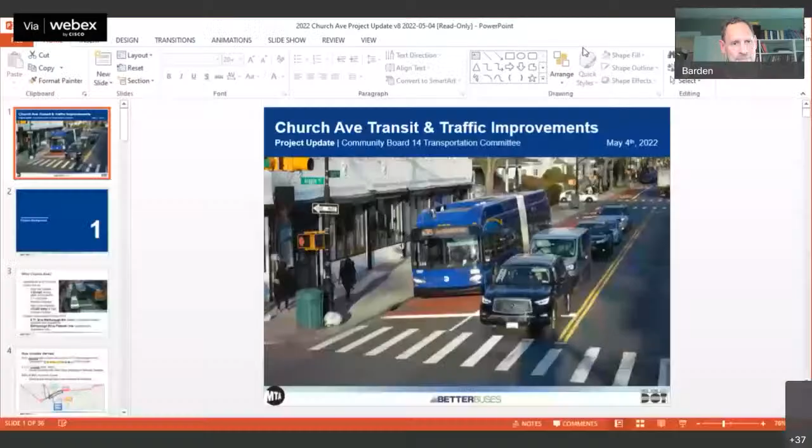Great, let me go ahead and share. All right, you all can see my screen, correct? Yep, great. Well, thank you so much for your time everybody, we really appreciate it. My name is Sarah Feller, I am a project manager on DOT's bus priority team. I have a cold right now, so if I cough, please excuse me. I'm joined by Warren Berry and Andy Inglesby from MTA. This was a joint project of ours.

You might recall that on Church Avenue, we put in a bus lane late in 2019 after presenting to CB14, CB12, and some other community stakeholders. This is a progress report letting you know how that bus lane has performed and where we're at now.

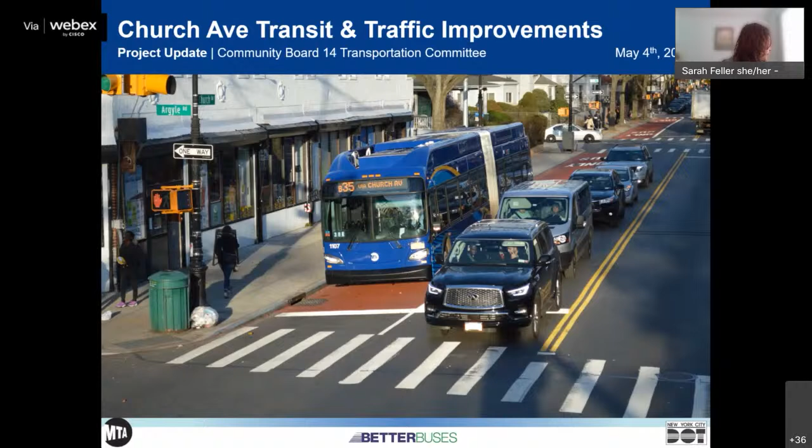So why did we do Church Avenue? Church Avenue was identified as a priority project in 2019 due first and foremost to very, very slow bus speeds. Church Avenue had bus speeds of about 4.25 miles an hour during the peak periods of the day, which is about a New York walking speed. And we know that especially on a busy route like this, one of the busiest routes in Brooklyn, with more than 45,000 people a day using the bus routes that use Church Avenue, on a route so busy, service should work better. It should be reasonably fast, it should be on time, you should know about how long it's going to take you to get from A to B. We need to get folks going where they need to go. And so we knew we had to do better, and that's why we pursued a project here.

After the community outreach process and the developing of this project, we implemented in October 2019: first, some curbside bus lanes from East 7th Street to Marlborough Road, and then updated curb regulations from East 7th to Marlborough, and further east as well, all the way to Flatbush. I'll show you that in a map in just a moment.

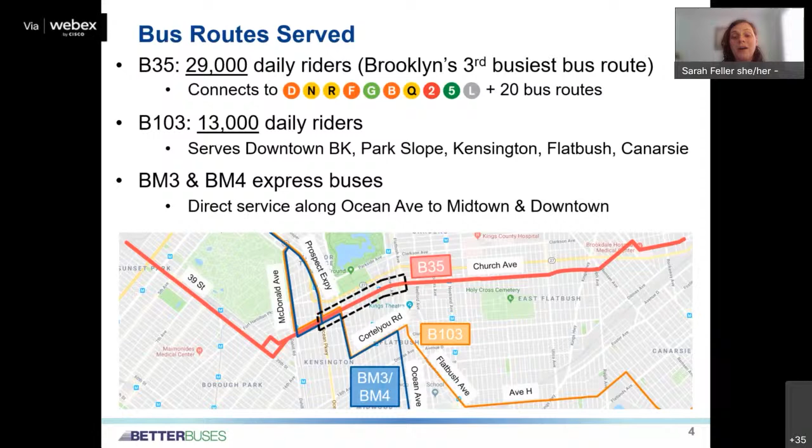This is a quick rundown of the bus routes that are served. Of course, the most important route is the B35. This goes all the way down Church Avenue, and then out in Borough Park, Sunset Park, it goes into 39th Street. So it's a really, really big, long crosstown route. It connects about a dozen different subway routes, and it's one of the busiest and ultimately most important bus routes in Brooklyn, in addition to 3 other bus routes that use certain parts of Church Avenue.

This is a quick aerial map showing where we put in each treatment.

Outlined in blue on the left side of the screen, from East 7th Street to Marlborough Road, is where we added curbside bus lanes and updated curb regulations to reduce double parking and ensure parking spaces were available on side streets when the bus lanes were in effect. Further east, from Marlborough Road to Flatbush, we updated the curb regulations only. In that area shown in yellow, we did not pursue a curbside bus lane, largely because it's so busy there.

There's so much curb demand. We studied how many vehicles are using the curb per day or per hour by block, and we realized that even though the bus needs it, a curbside bus lane wouldn't have worked there—there was just too much demand to use that curb for deliveries, shoppers, residents, and so on. So in the yellow section, all we did was update the curb regulations, again to reduce double parking and make more spaces available when people needed them.

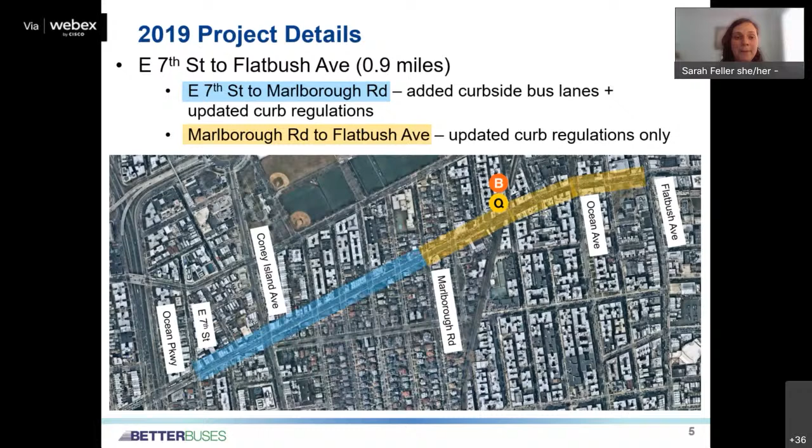This photograph at the bottom shows what the bus lane looks like today on Church Avenue, at Church and Argyle Road. This is the classic tried-and-true curbside bus lane—we've been putting these in New York City for more than 15 years, and they've generally been quite effective. This bus lane is active 7 a.m. to 7 p.m., Monday through Saturday.

That means parking is permitted overnight as well as on Sundays. You might recall that before this project, the Department of Sanitation was sweeping the street overnight three nights a week, so you couldn't park there overnight those nights. We worked with the Department of Sanitation so that now they sweep the streets while the bus lanes are in effect, and overnight parking is restored.

Some other benefits of this project: buses and all the people in them can now bypass traffic congestion. Especially on these short blocks, where there's a traffic light every 200 feet, instead of getting caught behind every other light, the bus can go through several lights without hitting a red, which really helps.

Additionally, since the bus is already up against the curb as it travels down the street, when it approaches a bus stop and needs to deploy the wheelchair ramp for someone using a wheelchair or walker, it's already parallel to the curb. That means it can deploy the ramp quickly and safely, which is definitely an accessibility improvement for folks who use wheelchairs or walkers.

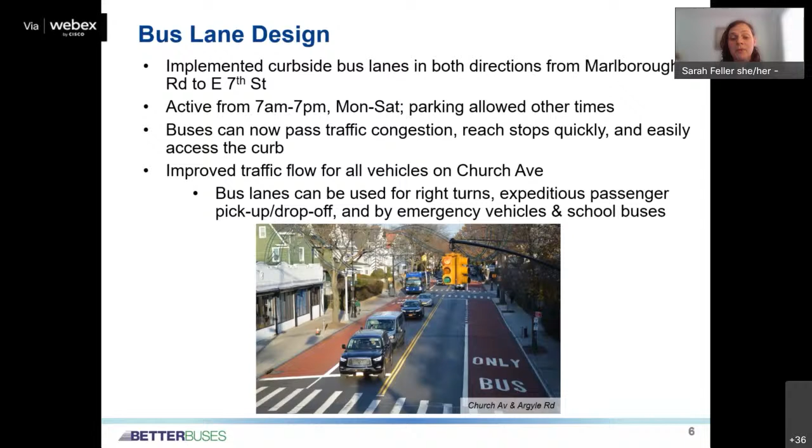Finally, this kind of bus lane can be used by any vehicle at any time to make a right turn, access a driveway, or quickly pick someone up or drop someone off. Emergency vehicles and school buses can use it at all times too. So it's not just buses and bus passengers who benefit—it really is a wider variety of folks.

I'll quickly walk you through what this looks like block by block now with these maps. These few blocks are in CB12, but I'll show them to you in geographic order from west to east, starting from Ocean Parkway. You can see these blue rectangles are where the bus lanes were added.

One thing we were very aware of with this project, which we talked about a lot with CB14 and in other meetings, was that obviously when the bus lane is in effect, you can't just park there. So if you need to visit a business or a residence during the bus lane hours, we want to make sure you still can. That's why we added new metered spaces on the side streets, right around the corner from Church.

So we added these spaces on the side street right around the corner from Church. The new metered spaces are the green rectangles, and we also added loading zones for businesses to get their deliveries. Those are in orange.

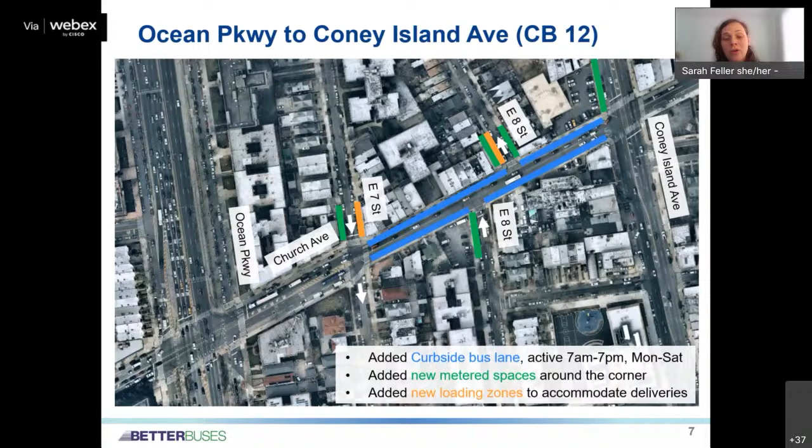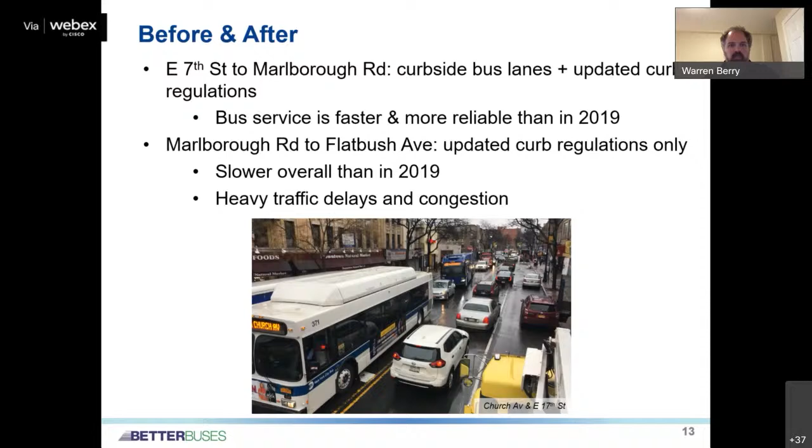I'm sure everyone in the community is very familiar with the traffic issues in that area. So now I'm going to turn it back over to Sarah, and then my colleague Andy is going to get everyone an update on the Brooklyn bus redesign to finish up. Thanks so much. Great, thank you, Warren.

So now I'll speak to the 15-minute unmetered parking zones that we put in east of East 16th Street. We did a study of four of the six block faces where we put in the 15-minute zones. Here's an example in this photograph — this is Church Avenue and East 18th Street, just across the street from the Q train station. Closer to this intersection, we chose the busiest parts of the block that had the most double parking, and we put in those 15-minute unmetered zones. Overall, on average, the double parking decreased.

On two blocks, we almost completely eliminated double parking, which is a really impressive thing, given how narrow this street is and how much it gums things up when a vehicle is double parked, especially a truck. The other two blocks actually had slight increases — we're not sure why, and we're still studying that — but on average, we saw a sharp reduction in double parking.

Additionally, on all four of those blocks, illegal parking — that is, parking in a bus stop, which also blocks the wheelchair ramp, or parking in a hydrant zone, which has its own safety concerns — all of that decreased as well. Overall, the 15-minute zones had higher parking turnover at all of those locations, and most motorists did respect that time limit. As a result, we expanded this pilot to Bell Boulevard in Queens, and they're studying the results of that going forward.

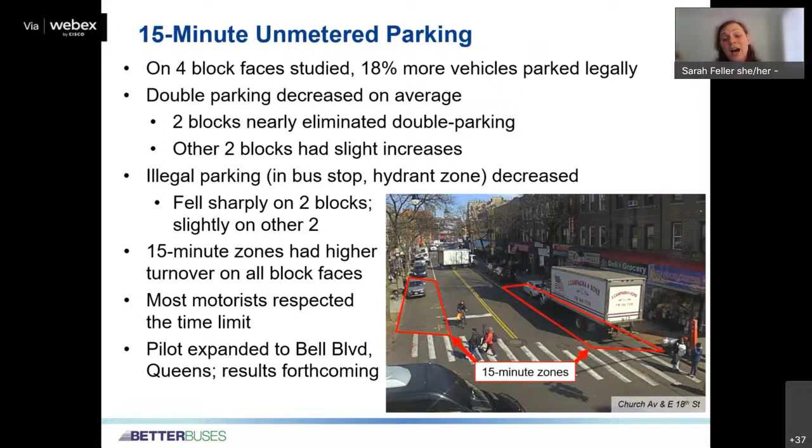Ultimately, when the MTA does these redesign studies, they'll identify corridors, and then DOT will start working with the community to develop proposals. Being realistic, Church Avenue is a likely candidate because it's so busy and so slow, but we have no plans at this time. That's definitely a future conversation, a medium to long-term kind of conversation. Thank you so much, appreciate it.

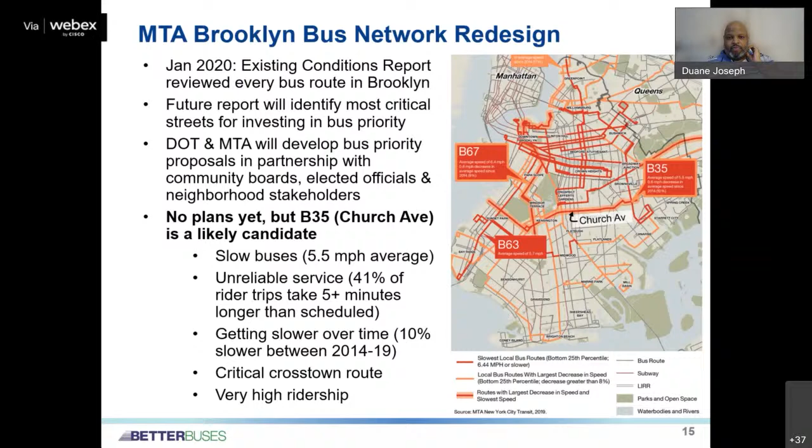Yes, especially that one. I just wanted to capture the increases and the difference in increases and decreases, for my own notes. And just for the second part, what is it? Marlborough to Flatbush. You said there was no... I guess Warren's the person responsible for this. Do you guys have any key KPIs around why there's a decrease at this point?

Do you want to take that, Warren? Yeah, in this particular section, nothing specific. I think I'd just say it's following a general trend we're seeing with slower bus speeds throughout Brooklyn. As you saw in that previous slide, we've seen about a 10% decrease throughout the bus network in the last 5 years. So this section is just following general trends of slower bus speeds throughout the borough, which we're working to address through the upcoming network redesign process.

I just want to follow up really quickly on the community conversations around where the bus lanes should be placed. I remember being part of a meeting where the community did request for the bus lanes to be between Flatbush and Marlborough. So to John's point earlier, any conversations around expansion would be good to have.

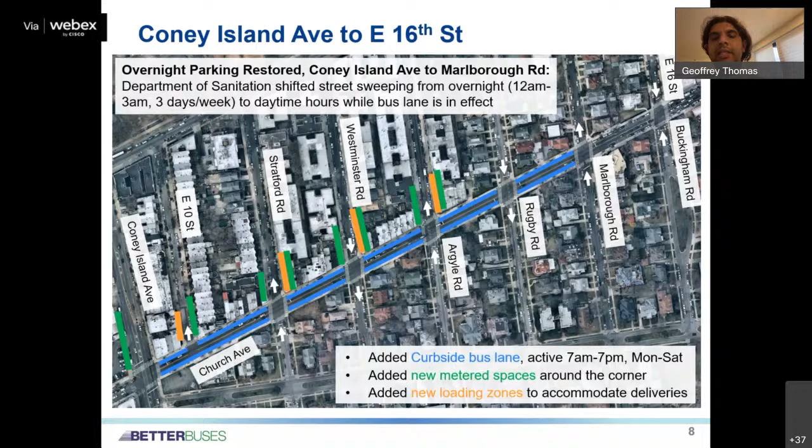So I walk by this bus lane pretty frequently, and I feel like I often see delivery vehicles, especially around the BQ station right at East 18th. And it often feels like it's many of the same vehicles. So I'm wondering if you are working with the delivery companies to try to stop them from blocking the bus stops themselves, and I see buses unloading in the streets. I'm wondering if you're working with them. And also, relatedly, I often see a lot of double parking at East 17th, like that block right there. I understand very well the point of there's not a lot of space, it's pretty cramped, but it feels like it's ineffective. It feels like it often gets practically gridlocked if there's 2 buses trying to move in both directions. I'm wondering if you have thoughts about how to improve those specific blocks.

Sure, thank you so much for that. To answer your first question about working with delivery companies, DOT has a whole department that focuses on freight mobility, and they do coordinate directly with the industry and with specific trucking companies. I mean, ultimately, it's really challenging. If I'm a delivery driver, I'm going to do what I need to do and risk a ticket to get my job done quickly, and I think that's the unfortunate reality. It's like when you're working on narrow streets, that's kind of how it pans out. And again, that's why we try to, as an agency, create opportunities for vehicles to park legally at the curb and try to discourage double parking using both carrots and sticks.

And we're going to keep trying to do that on Church Avenue and other streets as well. For East 17th Street, that block, that's definitely a really busy block. We'll look deeper into that. It's really challenging because you have the subway station, obviously there's a ton of drop-off activity, Ubers, dollar cabs, people dropping off their relatives in their own cars, you name it. But thank you for that, thank you for the intel on that though. We'll look into the gridlock there and see if we can do anything.

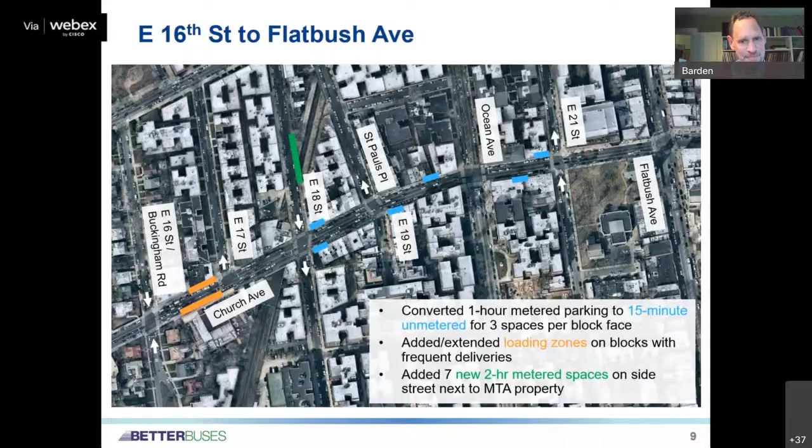So with that little diatribe, I'll move on to Agenda 3, which is Report on Urban Design from Neil Gagliardi, the Director of Urban Design, NYC Department of Transportation. Are you here, Neil? Yes, I'm here. And I'm joined by Nick Pedinati, our Deputy Director, and Christina Yu, our Senior Project Manager. Thank you so much for inviting us tonight. Let me just share my screen. Let's see if I can.

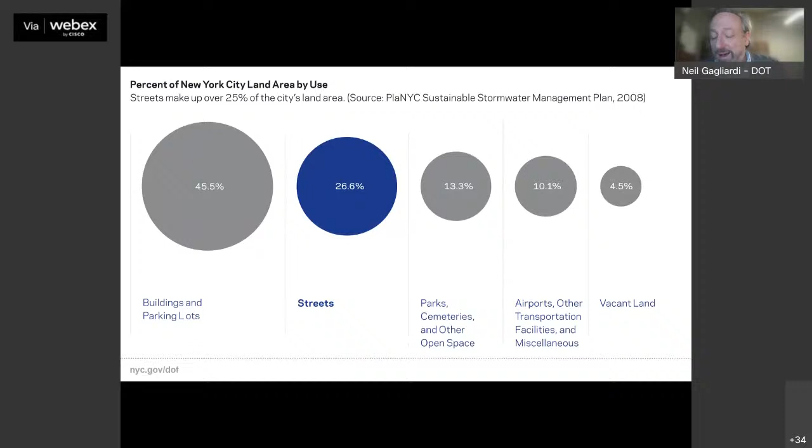So I wanted to mention that urban design is really a compact group of designers within a larger group, and certainly a large agency. Although our tentacles move out very widely among different units. And I always like to start off with the statistic that our real estate at DOT is almost 26 or 27% of the city's land mass, which is pretty significant. I know Kyle was earlier talking about open streets and the impact that has. So we have a great impact on the city in general and neighborhoods, and we take that very seriously.

Our urban design unit is part of a larger unit called Cityscape and Franchises, which handles the city's coordinated street furnishings like bus shelters, as well as Citi Bike and also revocable consents, which is a consent for private structures on public right-of-way. But our mission at Urban Design is to align state-of-the-art design principles with the agency and city's policies, and to advance context of neighborhood and pedestrian-friendly and dynamic streetscapes. We're also focused on developing area-wide plans for communities and coordinating with multiple agencies. More and more, our focus is to foster environmental stewardship, social equity, and economic viability in all the projects we work on that the agency is involved in.

We essentially at Urban Design have two main functions. One is we are the liaison for the Public Design Commission and the Landmarks Preservation Commission, and we interact very closely with our sister agencies on a number of projects. We're also stewards of the Street Design Manual, which we publish periodically. We're also involved in design services and project management, in-house design, and managing a lot of our larger scale capital projects. Intermittently, we do initiate programs as they arise, as needs arise. I'll go through some of that.

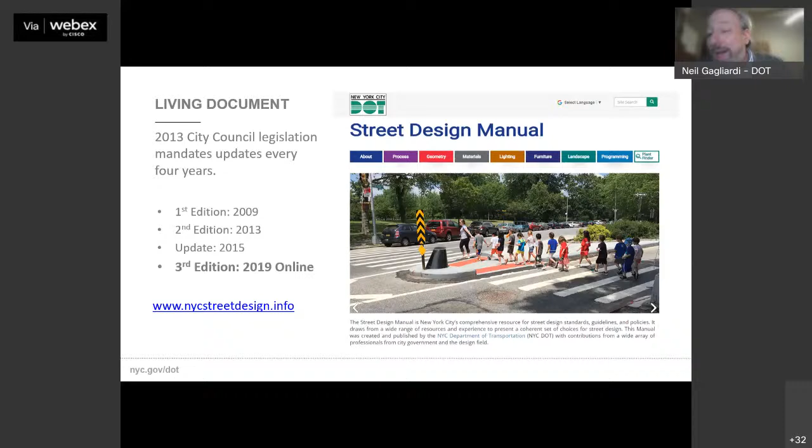One of the main elements, and really the compendium of street design in New York City for DOT, is the Street Design Manual, and it's online. The first edition was in 2009. It's now, since 2013, mandated by city council legislation for updates, and we now have it online since 2019.

The manual, as you've probably ventured into for a number of things, really lays out siting guidelines and parameters that drive us internally about how to design streets, but also externally to advise designers and groups on how to arrange things on the street. This is becoming more and more important as our streets are getting more and more complicated in how we design them.

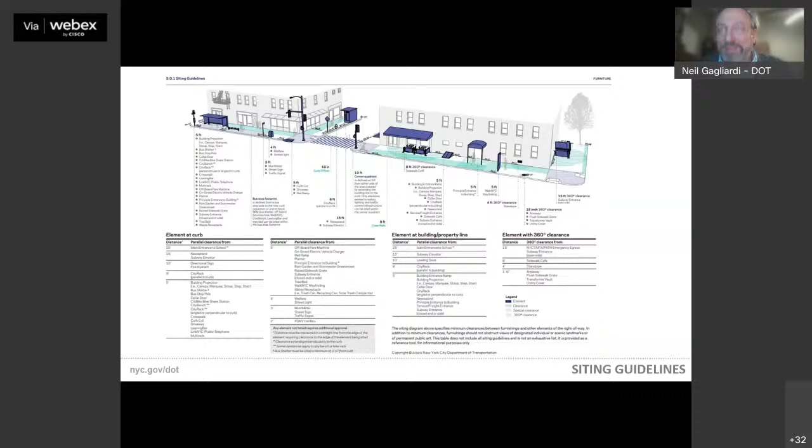One of the challenges now that we're online is really to keep up with the ever evolving changes on the street. One of the things we're working closely with Kyle's group on is incorporating open streets and the parameters of that into our manual.

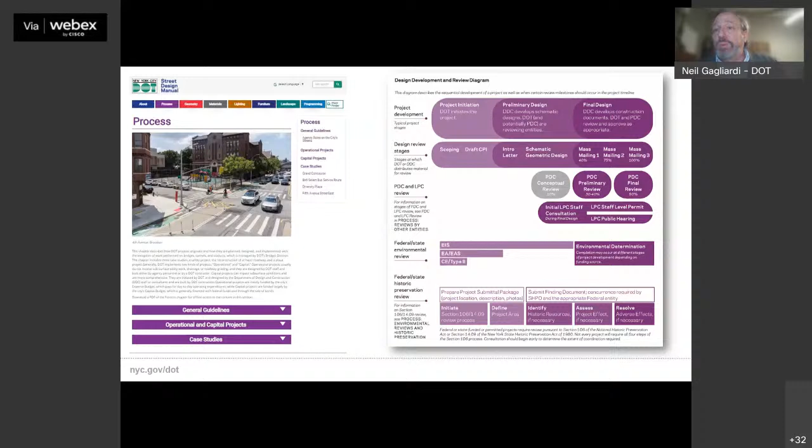We're also very much involved with interagency and intra-agency reviews and the approvals process with the Public Design Commission and the Landmarks Preservation Commission. Some of the typical projects are our major capital projects, streetscapes and plazas, bridges, pedestrian bridges, and bridges over rivers.

We also manage a lot of the private applications that come to the agency that are on DOT right-of-way. A lot of this, I know in Community Board 14 and in the past, have been private planted areas in front of buildings that are on the sidewalk, and those require revocable consents.

We also manage projects like furnishings, wayfinding, distinctive sidewalks, and other guidelines, and very significantly distinctive lighting. I know there's M poles on Church Avenue and Flatbush, just as there are Bishop's Crook on Newkirk Avenue. So we manage that and work very closely with our street lighting division, working on the plans and securing reviews and approvals by the Public Design Commission.

What we do as a staff is really focus on putting it all together, based on the design principles laid out in the Street Design Manual. Of course, our agency's major goal and mission is providing safety, but some of the other design goals are to ensure balance and inclusivity in our street design, and vibrancy, which is evident in some of the programming that Kyle talked about earlier, as well as our pedestrian plazas and streetscapes.

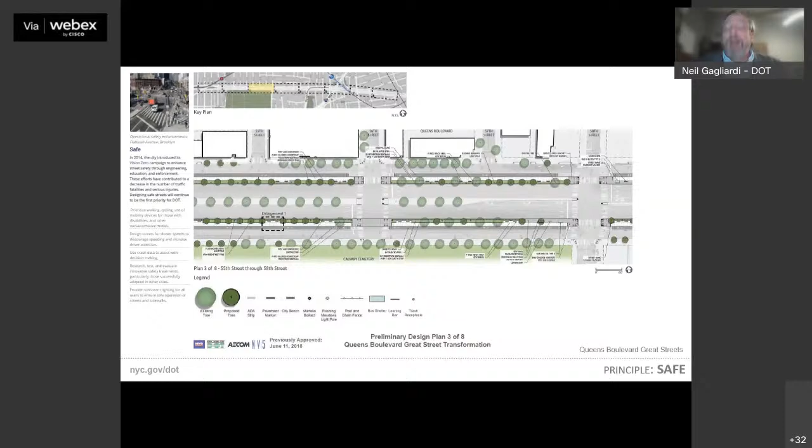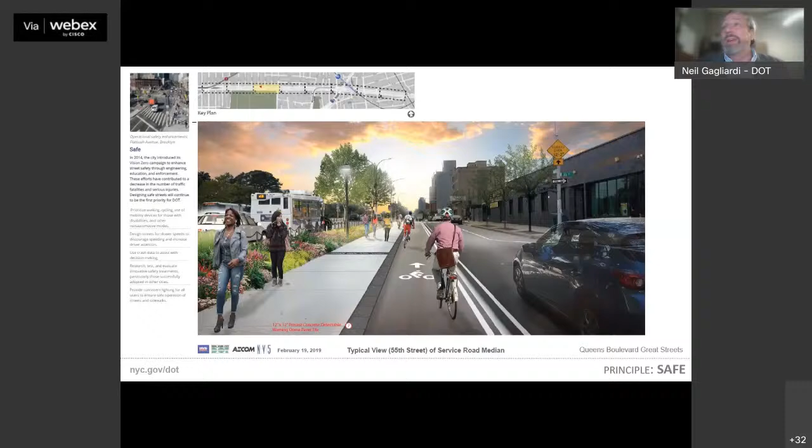I'll walk through this quickly, following some of the principles. Queens Boulevard is one of our great streets being redesigned with the foremost goal of creating safety along a rather treacherous stretch of the boulevard. We really look to the coordination among consultants and our other colleagues about the design and how the look and feel of that works for pedestrians and cyclists as well as motorists and residents.

Also, I mentioned sustainability and resiliency. We've really been working for the past decade on best practices of tree plantings and shared tree beds and bioswales, and working with our sister agencies on these efforts citywide as well.

Vibrancy is really important. This is really a sea change in the past decade or so in how we use our streets and create pedestrian and public plazas, employing not only seating and vegetation, but also art in it.

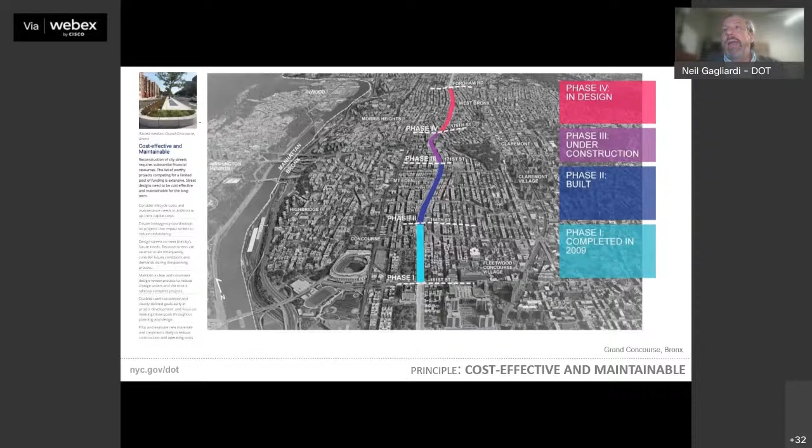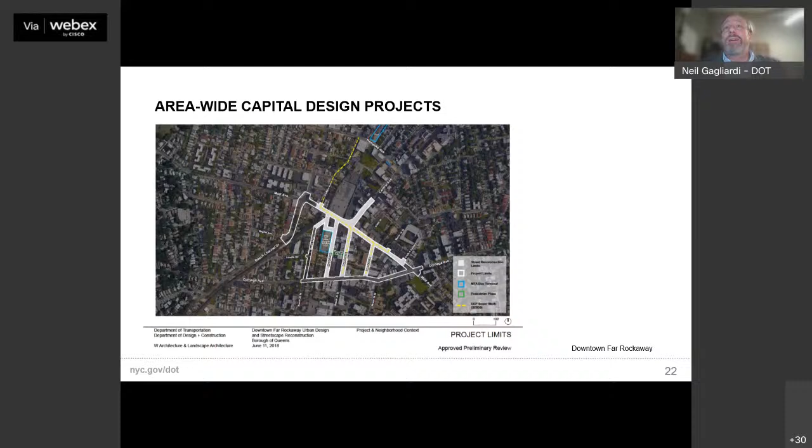As a unit, we also are involved in larger scale capital projects. One of them is in downtown Far Rockaway, which is a major reconstruction of the street system downtown, which spurred a whole rezoning and a number of affordable housing units.

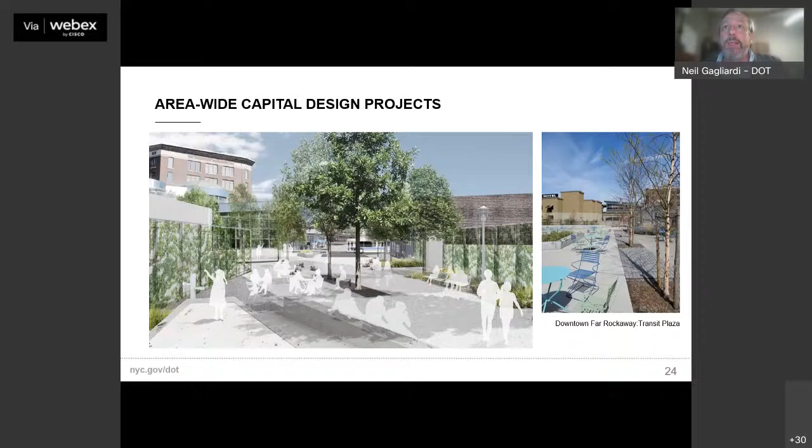We've also really concentrated in a number of locations around the city on comprehensive streetscape design plans. This one is in downtown Jamaica, and through a very extensive outreach process it identified 5 or 6 focus areas for redesign and reconstruction, and we're working on that right now.

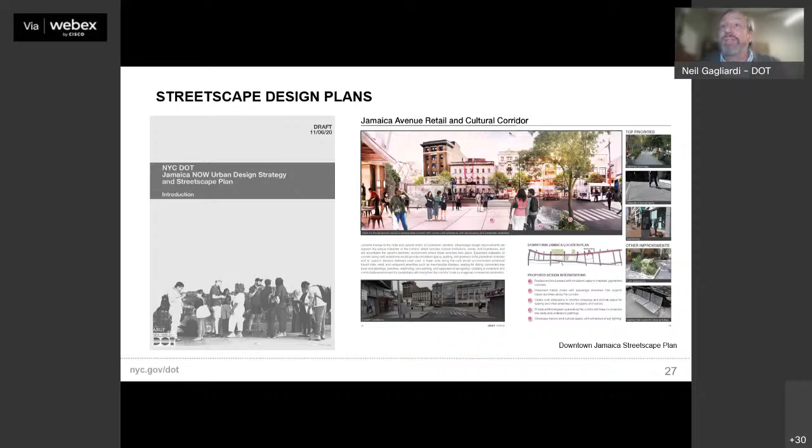One of our program initiatives for the past couple of years has been what we call Under the Elevated. We originally partnered with the Design Trust for Public Space to look at the space adjacent to and underneath elevated transportation infrastructure citywide. I don't think CB14 has this, though there's certainly infrastructure, but we're looking at it from a very comprehensive standpoint citywide, and looking at ways of developing new standards and design components that could be inserted incrementally to improve the spaces.

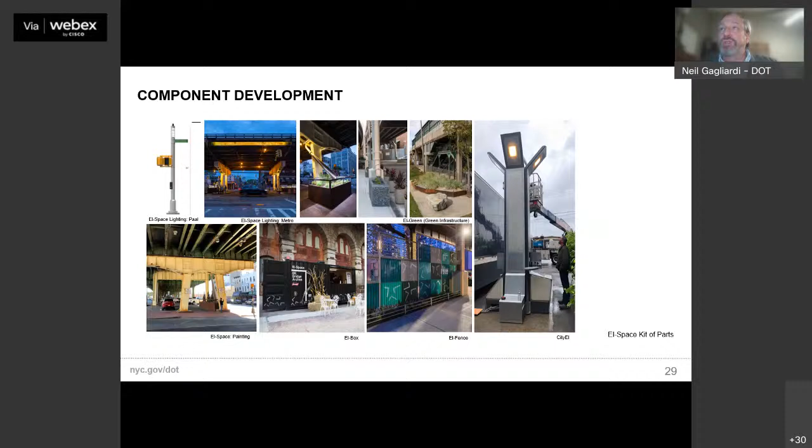This includes lighting, which is a key element of these spaces, some green infrastructure, fencing, and some new furnishing on the right-hand side called CityEl, a transit furnishing. We're looking at this very comprehensively, looking at this underestimated or undervalued asset citywide, and trying to map it to see how we can optimize this space.

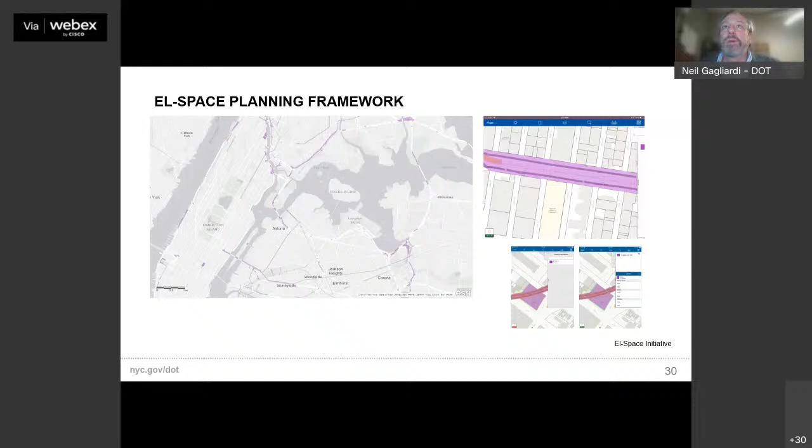And lastly, we engage in design advocacy across the city, really working with colleagues, designers, and other friends to move the needle on best practices and great design for our city streets and public infrastructure.

As a former chair of the Community Environment Committee, your world sort of bridges those two halves of my involvement in the community board, so I was particularly keen on it. Sean, I believe you have your hand up, and Florencia, is your hand up from the previous question or for a new question?

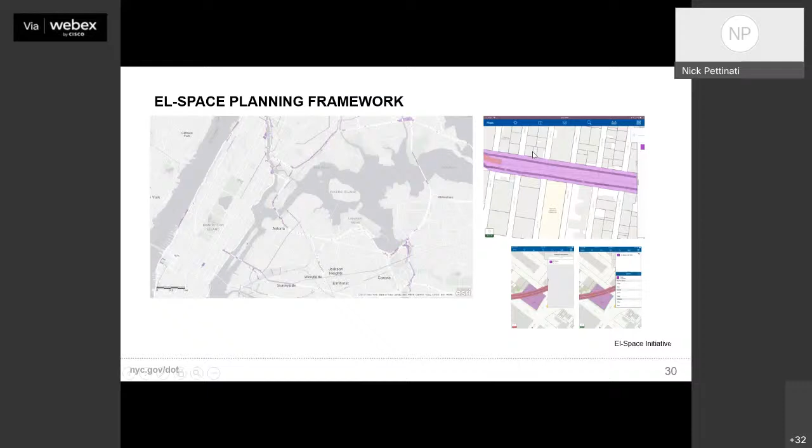We do have now in place two borough-wide contracts, one for Brooklyn and one for the Bronx. We're working on a third for Queens as we continue to roll out capital investments there. So those contracts are in place, and we have a landscape contractor that visits our Vision Zero Great Street sites regularly. We do constantly work with our borough commissioner's office to address issues that come up at various locations. I think the short answer is, if you can work with Dash and Diana from our borough office, and let us know those locations specifically that have been of concern, we're happy to take a look.

We do have a really good working relationship with our counterparts at the Parks Department, and there's sometimes overlapping jurisdiction, so we're happy to try to sort that out and see what makes most sense. We're also, as part of that program, trying to work with our legal department to see how we can foster community stewardship of these green spaces in a safe manner. Your point about volunteers with weed whackers in the middle of traffic is really at the core of that, and something we want to take very seriously. At the same time, the spaces that are most successful are the ones the community around them really cares about, so we want to figure out how to make that work. In the short term, please let us know those locations more specifically, we're happy to take a closer look, and we'll continue to work long term on a solid maintenance solution. Hope that helps.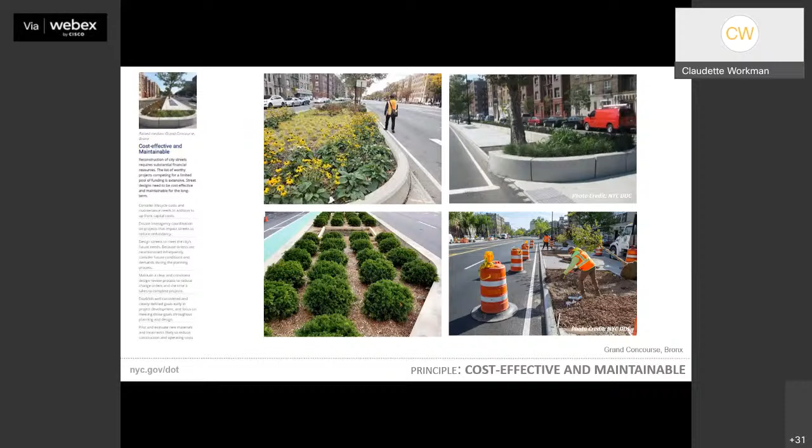Good evening. Thank you for having me. It's been a great meeting so far. It's always a pleasure to work with Community Board 14. Everyone is just amazing, and we can continue with the meeting. All good. Thanks so much.

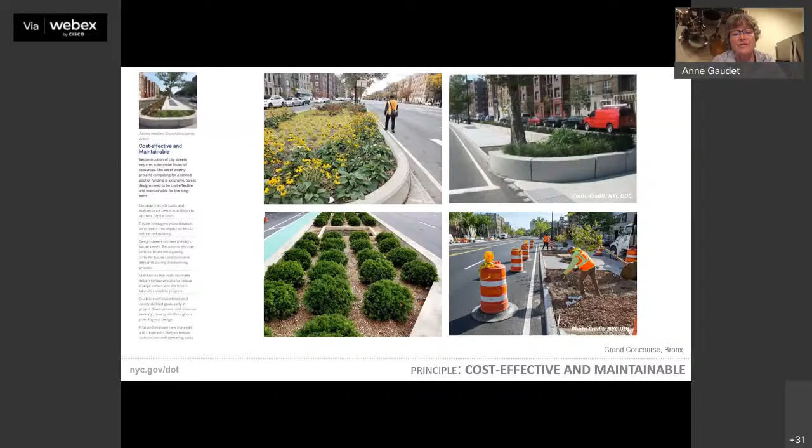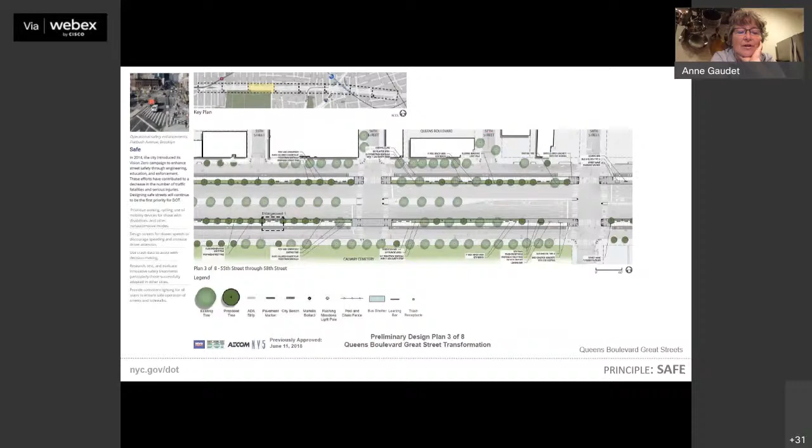I'd like to bring up shared spaces, and I'm curious if there's any way you could include consideration of partnering with other agencies to address some issues which have DOT certainly involved, as well as parks and other things. You mentioned bioswales and so forth in your presentation, which certainly help, and your point about maintenance was duly noted. I'm happy you've got some contracts on them.

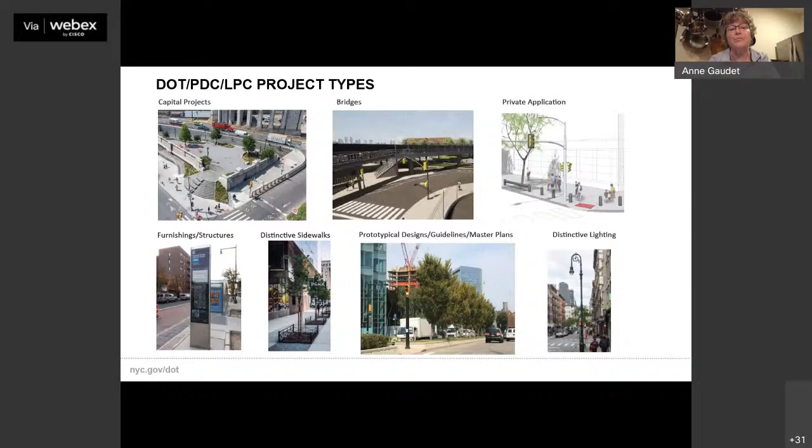But going back to flooding, we have some areas in the district, particularly on Coney Island Avenue at the corner of Caton, that are just full of extensive ponding from when the park gets emptied. There were conversations earlier about the possibility, so it's all sort of couched in tentatives, of using some newer concrete that offers more porosity, so perhaps some of that could be stopped en route. But again, it's under Parks' purview. I was wondering if, in addition to bioswales, there are other tools in your toolbox that could be used to help residents and homeowners deal with this reoccurring problem, as well as partnering with other agencies who sort of create the problem. Thank you very much.

I may ask Nick to talk more specifically, Anne, but I think what I pulled up is a design element that emanated out of the DEP bioswale standard that was developed, though Hudson Square BID in Manhattan really further developed this shared tree bed with structural soil underneath and permeable pavers. So there are things we are pushing forward. It's actually writ large in the downtown Far Rockaway plan as well, and in construction, and we're trying to move this forward as a kind of new standard for situations like that.

One of the things, as you mentioned, is maintenance. Right now, Parks certainly has stewardship over the tree beds, but not these permeable pavers and structural soil, citywide. So I think it's fair to say we need to all work together to raise the bar of these kinds of treatments in appropriate areas that might benefit communities and locations like you're talking about. I don't know, Nick, if you wanted to add anything to that. We had a number of other committee meetings in different committees over the years on this flooding issue.

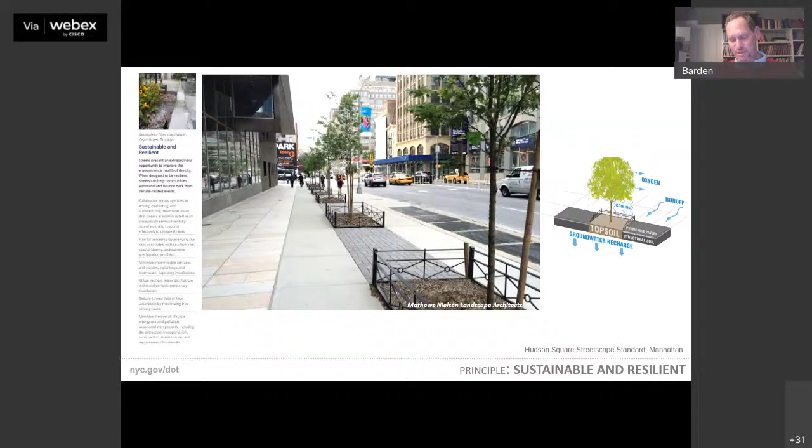The first is a presentation from Rona Taylor from the East Flatbush Community Development Corporation on electric dollar van initiatives. Rona, are you here? Yes, I am. Thank you so much for having me and making space on the agenda to hear what we wanted to share with you all this evening.

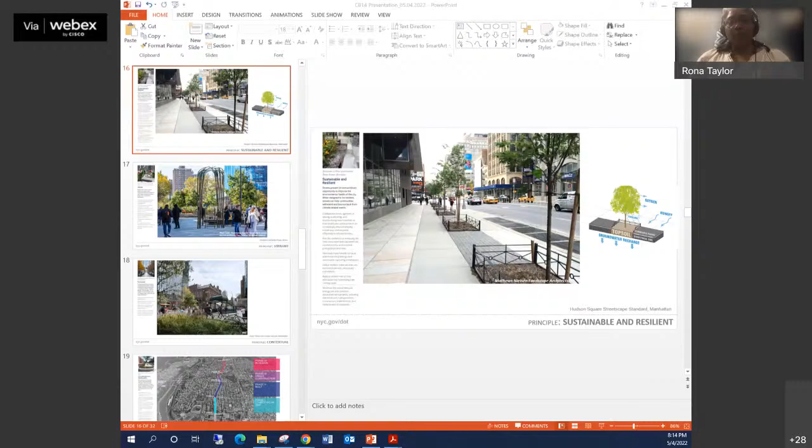My name is Rona Taylor, I'm the Executive Director of the East Flatbush Community Development Corporation. Our mission is to work hand in hand with community leaders, nonprofits and funders to spark lasting social change for a fair and just Brooklyn, primarily through community development programming. I'm joined by my colleague Theo from Perch Advisors, and we're here to provide a brief introduction to a green initiative that would deliver community-aligned clean transportation solutions that reduce local air pollution, help overcome persistent transportation challenges, and improve quality of life in communities where it's needed most.

Can I interrupt briefly? Of course. I'm not sure, how long do you think your presentation is going to take? 5 minutes max. We settled on 3, but okay. 3 minutes, good. It could be a presentation I think the neighborhood would enjoy having more of an opportunity to get into. I don't know what your schedule would be, but maybe you just give a quick blurb now, and maybe we put you on the agenda for next month so you can have time to get feedback and fill in blanks. Which works for you? Sean, do you have a thought?